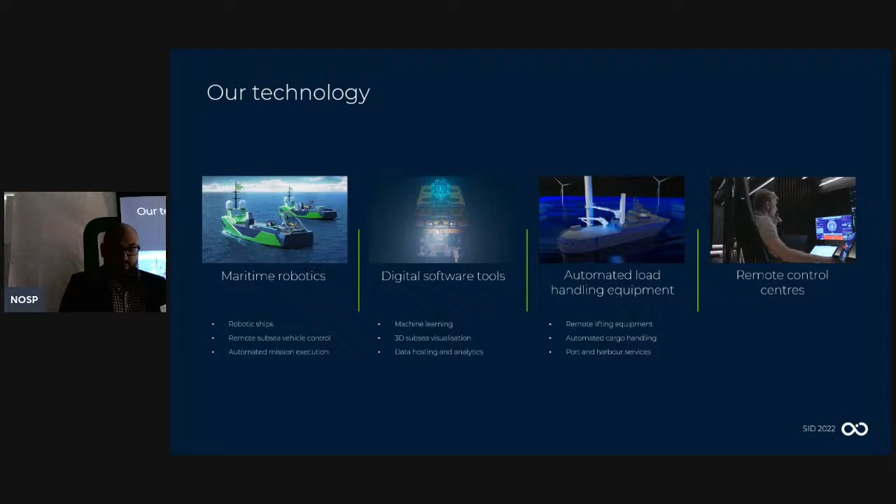And finally, our remote control centres bring all of this together and provide a focal point for our global operations. There's a huge focus on the human factors of everything we do at our RCCs, and being able to build these from the ground up has really given us the chance not only to future-proof them for the next 20 years, but also design and implement a revolutionary network infrastructure to allow us to realise the full benefits of remote operations and robotic campaigns.

Remote control centres, remote operation centres, mission controls, whatever each of us decides to call our own facility, they're not new anymore. Remote operations are alive and kicking and used to great effect all over the world. But when considering the infrastructure required to support remote operations on the scale that we're setting out to do, you have to think a little bit differently.

ROV piloting has been done from shoreside control centres for years now. USV control is taking place over satellite communications as we speak, and remote access to data handling, processing, and analytics is commonplace. However, bringing all this together into a single enterprise IT infrastructure and needing it all to run simultaneously and synergistically hasn't yet been done.

So when we set out to design and build the first of our global remote control centres in the UK, it was important to have ultimate flexibility. We didn't want to have separate dedicated vessel pilot stations, ROV pilot stations, data processing stations. We wanted everything to be multi-role and modular.

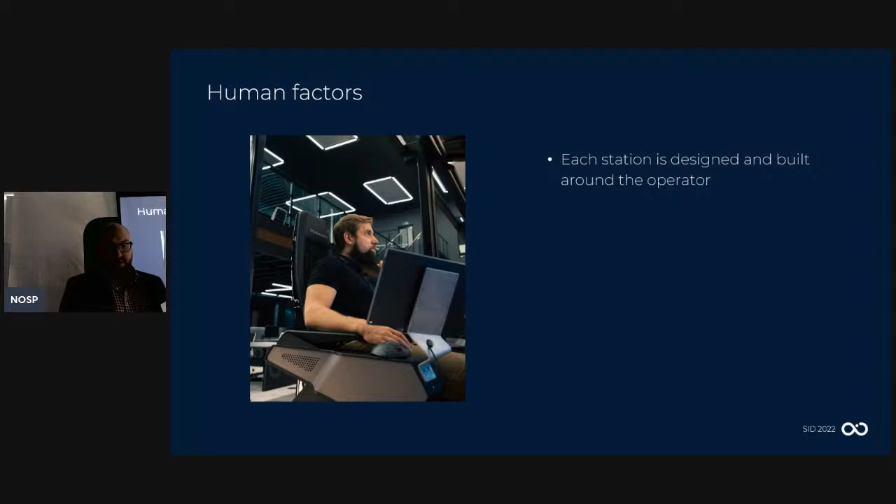Ultimately, we assume that the shifts worked within our RCC will be similar to the shifts worked offshore on a conventional vessel. So the chances are that our staff are going to spend long periods of time in this room, in this building, in these chairs, and we need them to be as safe and as comfortable and as anti-fatigue as possible. Even things like the elevated mezzanine floor in the middle, the glass walls, central supervisor and monitoring stations, the whole environment was modelled in multiple different ways to ensure both operational efficiency, but also promoting the highest level of physical and mental well-being for the staff.

Even in a world relying on advanced technology, our team of experts are responsible for safe and efficient operations at every stage. And without them, we wouldn't be able to operate. Our vessels will be automated rather than autonomous to begin with, and human-in-the-loop operations are absolutely crucial.

Now, as we move towards the trial phase of our remote setup over the last 6 or 7 months, it was clear that a few major hurdles sat in front of us. Of course, building the largest robots in the world brings certain challenges, not only in design, but also in the regulation and safe operation of these ships. I could stand here and talk literally all day about marine regulations for remote vessels, but I'm not going to.

Secondly, trying to build one of the most technologically advanced and complex shipbuilding projects the world has ever seen is pretty daunting. Throw into that an unprecedented global pandemic, a war in Eastern Europe, and you begin to understand why the initial Armada ships have been a little bit delayed.

Putting all that aside, I wanted to focus today on information transfer and how we do some of our data handling. We're revolutionising both ship-to-shore data transfer, but also crucially shore-to-ship as well, which is sometimes forgotten.

And hopefully I'll be able to talk you through that a little bit.

Communications and data transfer is literally at the heart of everything that we do. From vessel and payload control to data analytics, collection, appraisal, reporting, everything relies on maximising the amount of information that we can transfer over the internet. It's all in a low bandwidth, high latency environment, and that brings its own challenges.

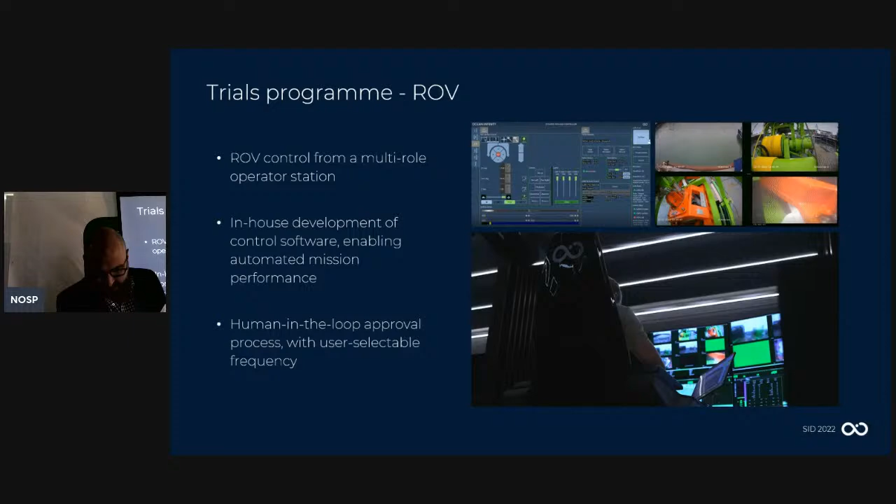So what have we learned from the recent trials as we push towards Armada operations when the vessels arrive? Well, firstly, we've successfully tested and trialed our payload command and control, and with that, the real-time monitoring of data quality and file health over low bandwidth. We've worked on our quality assurance processes, and we've worked out what would ordinarily take place with the offshore team, replicating that experience from the comfort and advanced infrastructure of our remote control center.

These are some key steps between now and fully fledged uncrewed operations, and as we transition to a more robotic future, these elements will form the basis of our data journey with our clients and with our uncrewed ships. We're currently working on more data standardization and governance as it moves through our handling process. We're using more automated analytics and appraisal, and we need that standardization to assure that the same high quality products are being produced for our experts repeatedly and safely. This also allows us to move ahead with a lot of our machine learning that I'll touch on another time.

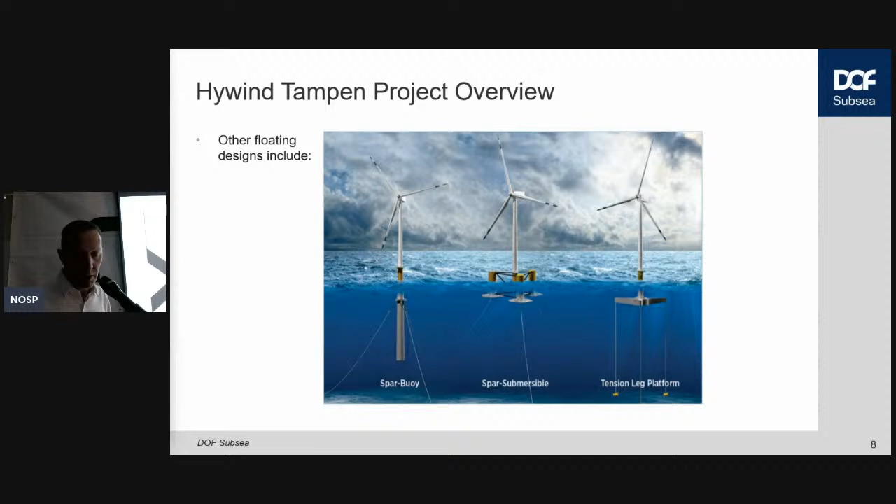So where we're at the moment, status August 2022, all 19 of the anchors are in place, of course, in the Honeycomb design. There was a really good LinkedIn 3-minute video explaining the why and what benefits the Honeycomb design brings - it's extremely financially efficient, saves a lot of money by having it in those designs, and you can take away floating wind turbines from one location and take it to shore and replace it with another if you so desire. So there are a lot of benefits with that Honeycomb design.

All 33 anchor chains are in place, installed by Skandi Skansen, as I mentioned. So 7 of those turbines have gone in already, and next year, April 15th, is a tentative date for start-up of what would essentially be phase 2. We will be going out with Skandi Iceman, and most likely the other tugs that we used this year, which I'll go on to a little bit about shortly. I do believe that most of the equipment actually is ready - the only thing that's really holding back is a couple of items, otherwise all 11 would have gone out this year.

It's a shame because the summer was quite a good one for installation as well. They were knocking them out of the ballpark at points, towing them out within 3 to 4 days and putting them in again, then coming back and collecting the next one. So 3 to 4, 5 were going in over a month period, and 7 went in over just under 2 months, so not a bad installation rate. That's where the project is at the moment, so we'll start again next April.

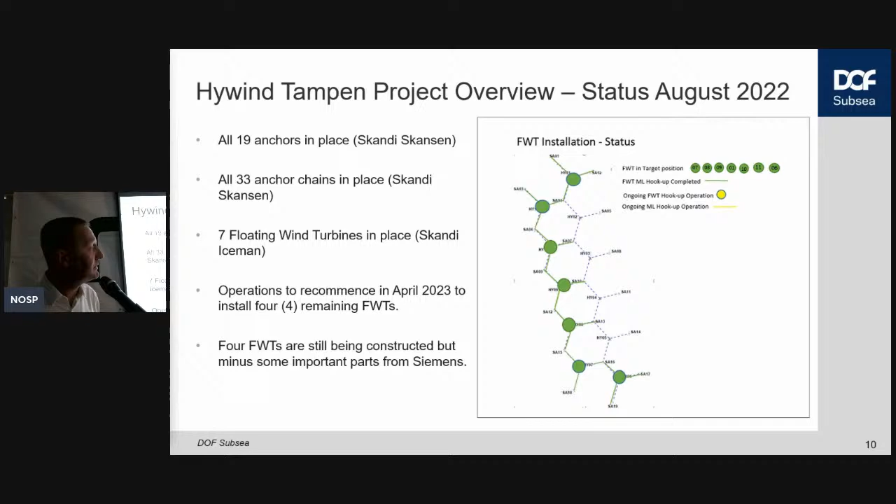A little bit about one of the requirements. It's all very easy, you can just make me think this is a glamorized rig move. In some ways it is, but there are elements and a lot of considerations that need to be taken into account when towing out and installing some of these turbines.

We consulted a lot with the captains on the tugs and on the installation vessels as well. We certainly had some poor experiences a few years ago that we didn't want to replicate with Skandi Iceman, which is ironic because it's our vessel. But we listened, sat down with them, and we came up with a solution that was probably more extensive than we would have liked, but ultimately everyone went away happy and we got good feedback on it. So what they were essentially looking for is positioning updates during hookup and tow out, quite self-explanatory, that's what you would need.

Heading updates as well, that's very key. And what was also very important was the mooring line and pad eye. They really needed to know where those were in relation to the tugs, all 3 tugs, and the floating wind turbine itself. There were also some interesting aspects, some lessons learned that came out of it where we need to make improvements, not just ourselves, but also with some of our subcontractors and the client as well.

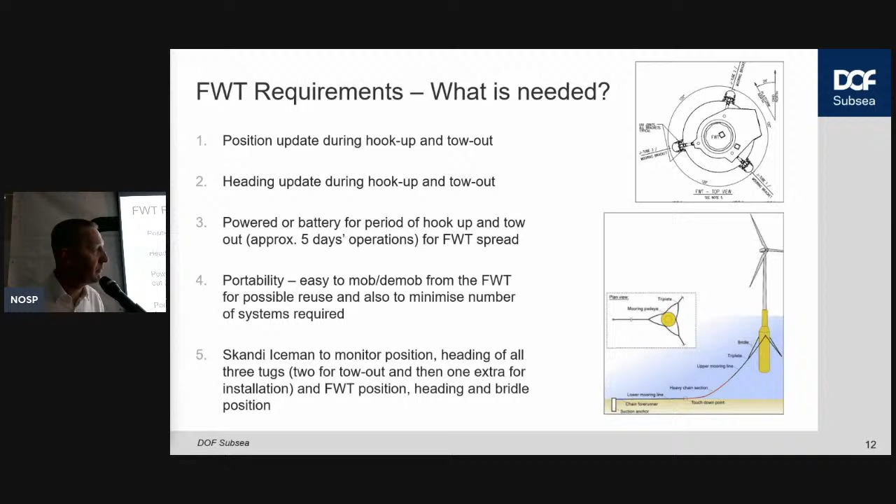So I just thought I'd show you what it ultimately looked like, this is how it looked when it was being towed out. This is just a drawing, but I do have NaviPac screen dumps of what it looks like. There's the lead tug, 2 tugs managing it, and a 4th tug was used and would shadow the tow out. When you got out into location, the lead vessel would then transfer to become the installation vessel, and the 4th tug, shadowing, would then become the positioning vessel.

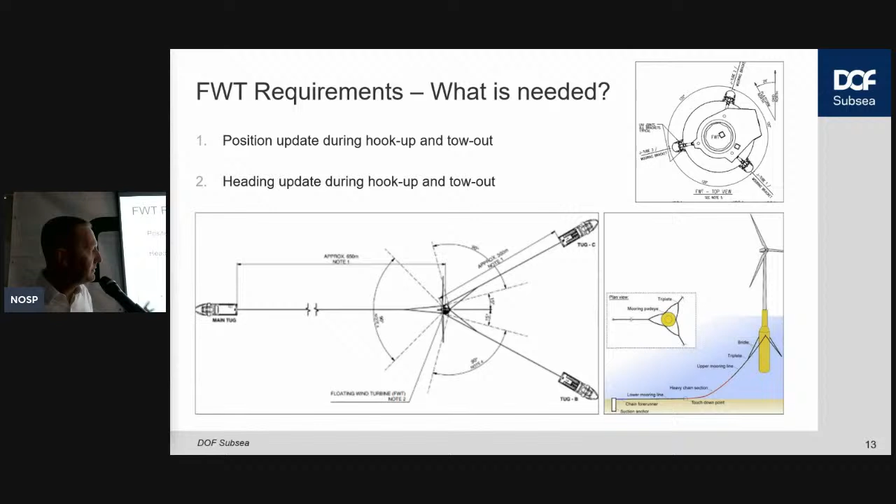So it took about 3 to 4 days to install, but that was the key part of what this was all about.

So this was the Skandi Iceman, one of, yeah, these are the project essentials. This is what we had to do, all that we required from early in the year to get ourselves to the position where we were comfortable to be able to tow this offshore and accurately position it. Tolerances were not exactly high for this, as long as the anchors were in place, everything else seemed to just flow. So once everything was set up, it was very much a babysitting exercise, but there were lots of teething issues at the start.

So there's a one-off installation vessel and 3 installation tugs: the Norma Sigma, the Olivia Venus, and the BB Octopus. All of those had the AIS tug kit and the V123 of the Hemisphere, which I'll come on to in a little bit, and of course the 11 off floating wind turbines.

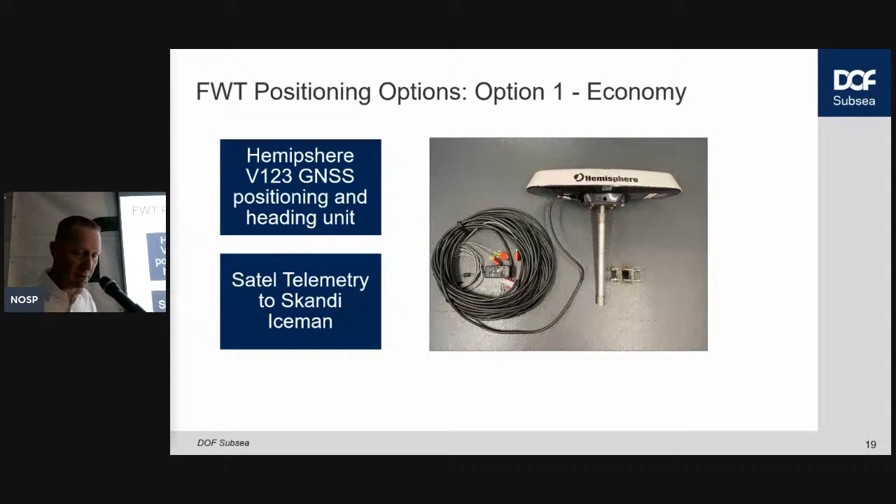So this was the economy package. The other one was the deluxe package, which is the fog gyro instead of GPS for heading and the radio Wi-Fi for transmission. This was definitely the Rolls-Royce solution, which we obviously looked at, but for various reasons weighed up pros and cons of each. We looked at the hemisphere and the fog gyro.

Basically those are the 2 options you've got. The heading was slightly off on the hemisphere, but considerably cheaper. I think we're certainly finding it - from a survey perspective, trying to get hold of equipment now is not easy, much like the airline industry - everyone's woken up and wants to do everything yesterday. So equipment is actually quite difficult to get hold of. Gyros had a long delivery time.

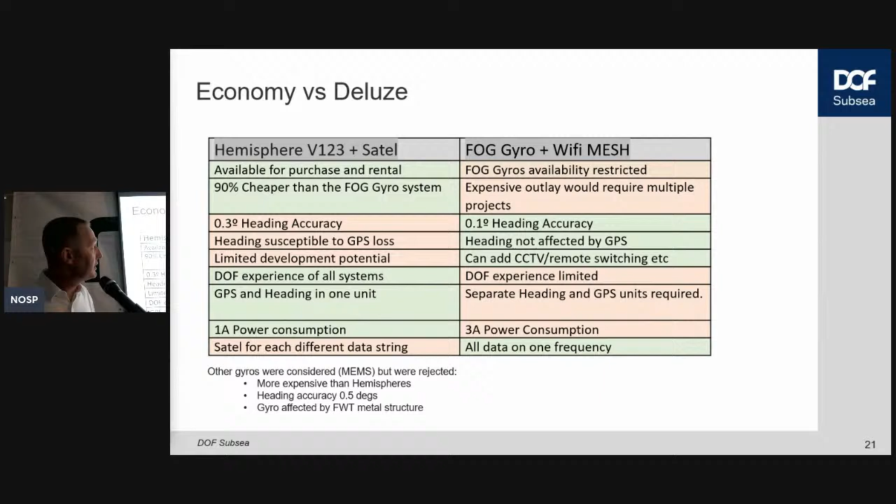The hemispheres, we already had quite a few of them in-house, and we needed to buy about 4 or 5 more. But ultimately it came down to cost - this isn't the oil and gas industry. We did look at other gyros; there are other gyros available on the market, not just the ones you saw on the screen just now. We looked at the MEMS, but ultimately we thought we're going to go with the hemisphere because we had experience with it, it was cheaper, and it fitted all the parameters that we needed to do the job. So it's economy versus deluxe, and the winner was, of course, the hemisphere.

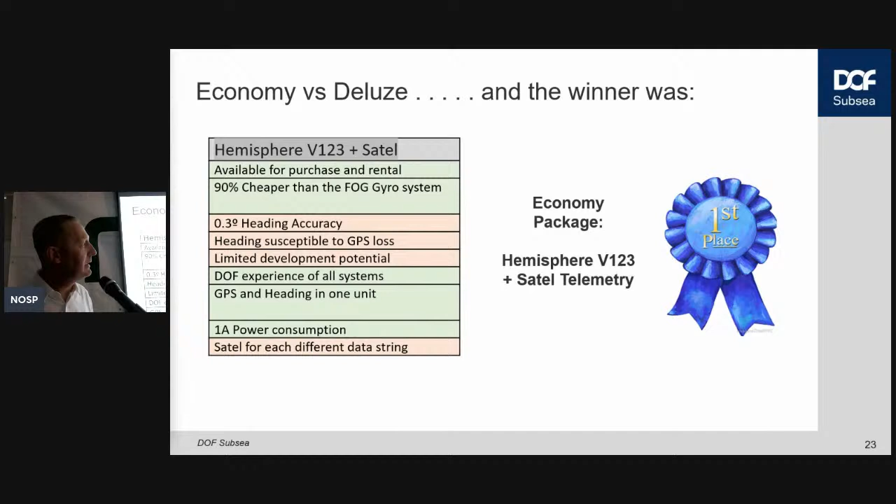As I mentioned, I don't think, like the oil and gas industry many years ago, it's very much necessity now within renewables. It's a different mindset that has to be taken. It's very much cost effective, and I think that also will come down to some of the procedures we'll hopefully be following in a few years from the client, that will drive us forward. So I think many years ago it might have been the deluxe model, but within renewables it was definitely the economy.

So what did the system, the hemisphere, the floating wind turbine survey equipment installation comprise of? Basically a hemisphere, antenna, and a cable. So very straightforward on that front, not that difficult. A SATEL telemetry kit back to

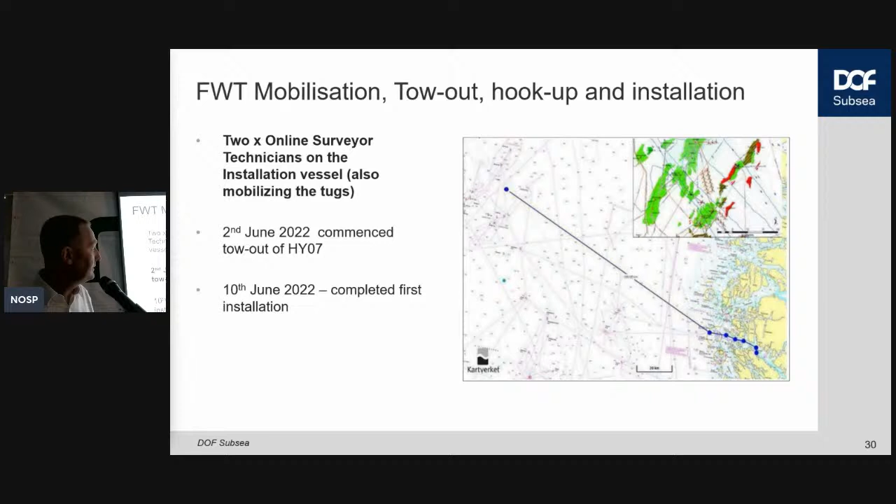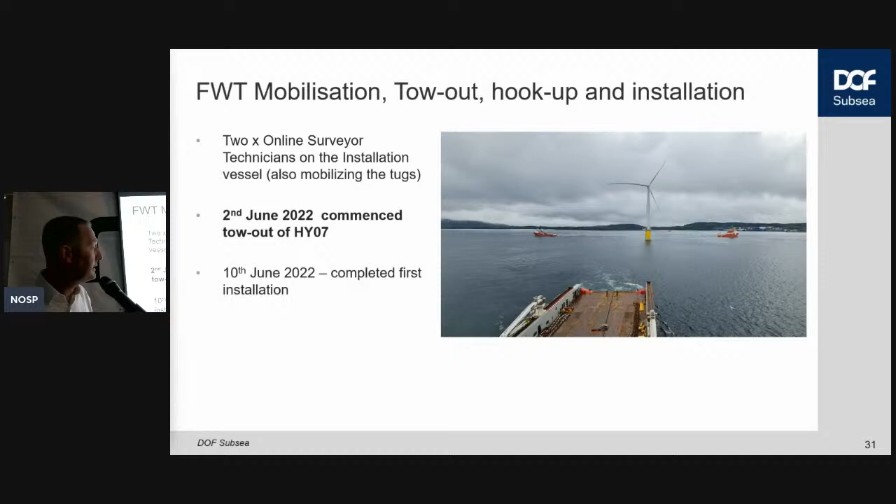So that is really the crux of my presentation. It wasn't as technologically advanced as Ocean Infinity, but it's a necessary part of what we're all going to be doing going forward. It's a survey project, ultimately positioning, and it was a very interesting project to be involved in. At the end of the day it also gave us the opportunity to take some fantastic pictures, both near shore. Some of our surveyors got very arty towards the end, and were sending me lots of lovely pictures.

So I just wanted to summarize some lessons learned, which I've mentioned quite a lot actually as I've been going: updated guidelines for renewables. This is the first big, large-scale offshore floating wind project in Norway. There's potential there to improve some of the procedures and guidelines on how we do that.

Earlier consultation of the contractor in the project workflow would save cost, time, and resources. We struggled to get the information that we thought we needed to do the job and deliver the professional outcome we wanted to the client. So again, small tweaks, nothing major, just maybe some changes in mentalities and attitudes.

There are so many contractors involved in these projects, not unlike oil and gas I'm sure, but greater interface management of contractors would save time and a lot of money and resources. So it's just a learning curve.

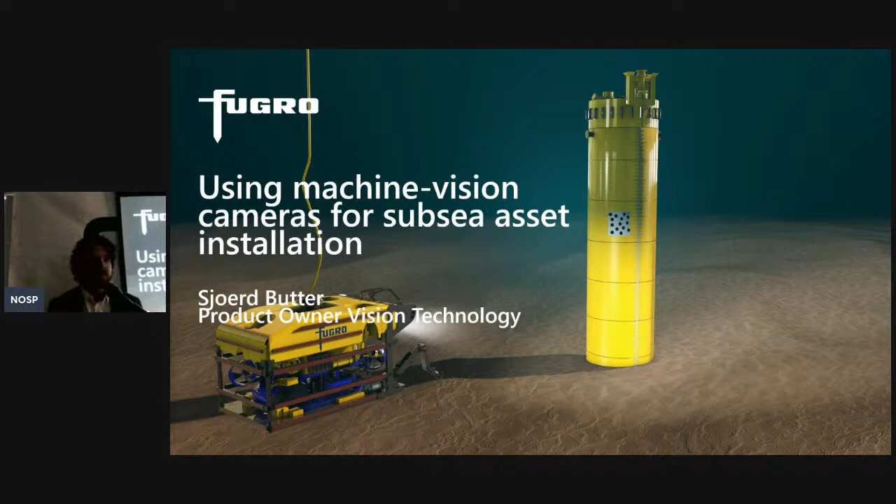The topic of today is clearly offshore - what we call the marine asset integrity environment, specifically positioning of assets. As I mentioned, today's topic is using machine vision cameras for subsea asset installation. What exactly does that mean? For installing heavy structures, you actually need quite heavy sensors.

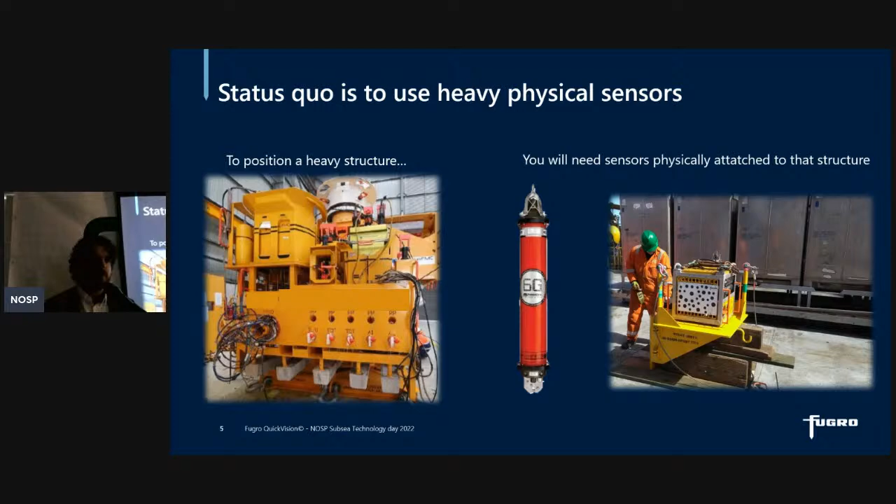I think we're all used to the classical positioning jobs where we have either a wellhead to install, a subsea anchor to install, and we have to mobilize either USBL or acoustic signal beacons or gyro packages. Typical examples you see here on the right - you mobilize on the assets, you dimensionally control them in, you test the signals, and you do your installation job as requested by the client.

However, using these types of sensors carries a certain risk, and I've provided an overview of this risk. Most of these sensors are actually based on batteries, and no matter how well you plan for your job, these batteries carry an inherent risk of failure. They can be charged at the start of the job, but sometimes we work in very deep waters. They can be turned on before lowering the structure, and the battery may run out of power, leaving you basically blind on the exact position or orientation of your asset.

Acoustic signal loss can occur - if no cables are attached to these sensors, how do you get the right information all the way up to the top side or to the vessel? So that's something that is risky as well.

There are some safety concerns around using these sensors. Most of the time they're heavy, and lifting operations are involved in installing them. Every lifting operation needs careful planning and the right safety procedures in place, because in itself a lifting operation will bring a risk no matter how well you plan for it. And the last point is that installing sensors, but especially removing sensors from a structure, can be quite a time-intensive job. You need an ROV in place, sometimes divers, but removing that sensor can be quite risky and time-consuming.

More like moving pictures again. Is this watchable or should I just skip over it? Yeah.

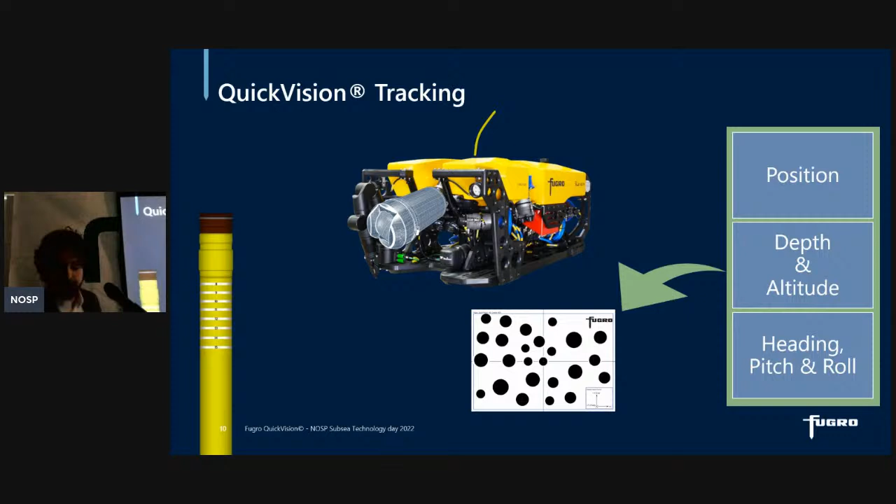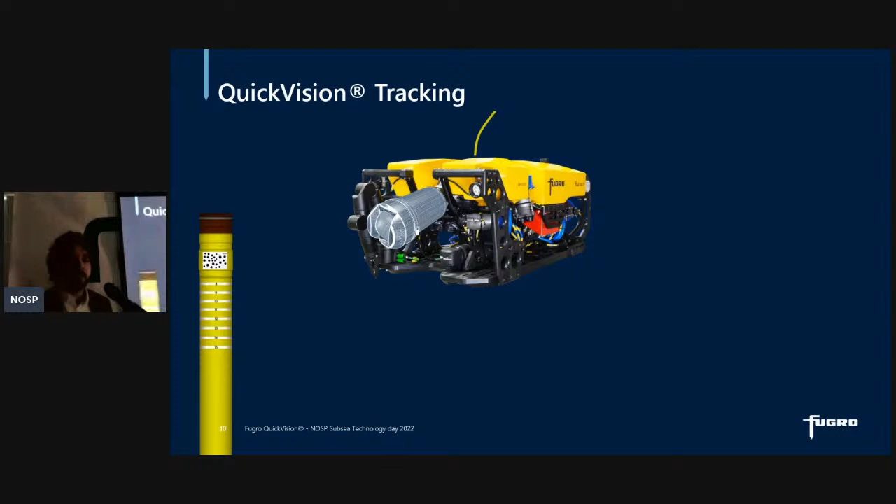Instead of placing physical sensors on your asset, we can remove these sensors and get these readings directly from the pattern. So the only thing that you have to install on the structure is the pattern. By placing the pattern, in this case on the conductor, and dimensionally controlling that pattern, we can simply observe through the camera the exact pitch, roll, and orientation.

We do that not just with a camera, we actually combine it with sensors that are typically available on the ROV. That can be either a gyro, an INS, or USBL if you're interested in the exact position of your asset. Combining that with the video stream and the readings we get from the pattern, you get accurate data from your asset.

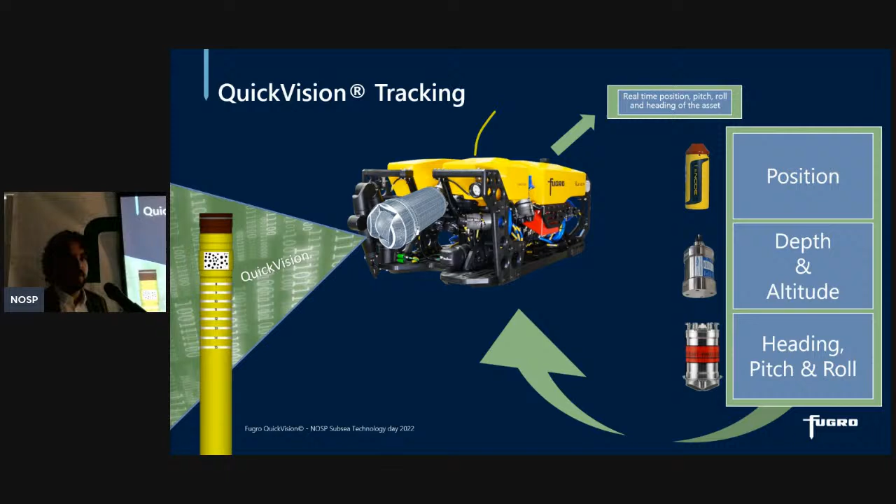You actually only need 8. Most of the patterns we use have up to 28 of these black dots, so there's built-in redundancy, and you can use as many as you want. It's relatively cheap to produce, it's a sticker file. So you place 8 or 9 all around the structure, load them into the software, and that's all you need to get all the accurate information for this asset positioning job.

The pattern tracking also brings another convenient functionality, especially in follow-up work. Whenever a prior campaign installed a structure on the seafloor and a pattern is already available, you can use a principle called relative positioning to position the other asset on top. This removes the complete need for any USBL or LBL positioning to be in place. Your ROV can basically only use the camera and a gyro to position this structure on top of the other one, saving a lot of headache with USBL systems and removing it from your project. It's a good alternative for these types of scopes.

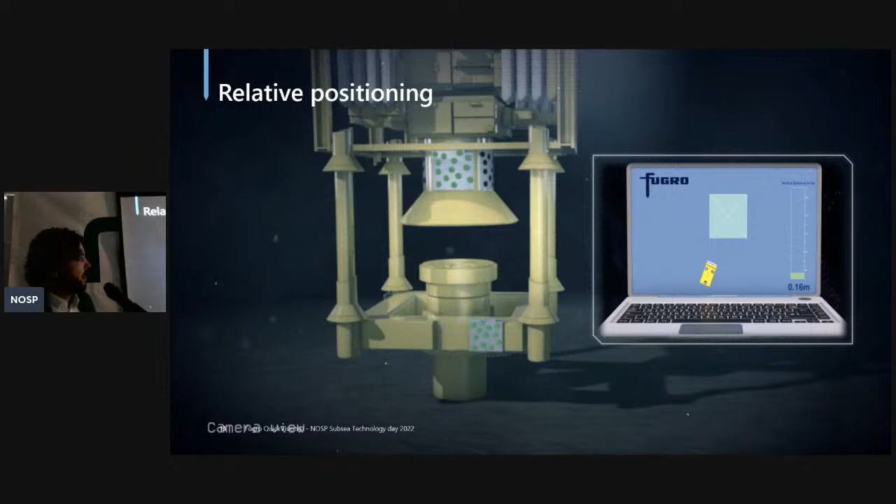Zooming in a little bit on the Augmented Reality Toolkit. I think it always presents itself on more random occasions in the project. Whenever we're already in the field and something pops up that needs to be measured, it's this toolkit that we call. I've got three videos, and it's a bit risky, but I'm going to try to play them because they have an excellent demonstration of these tools.

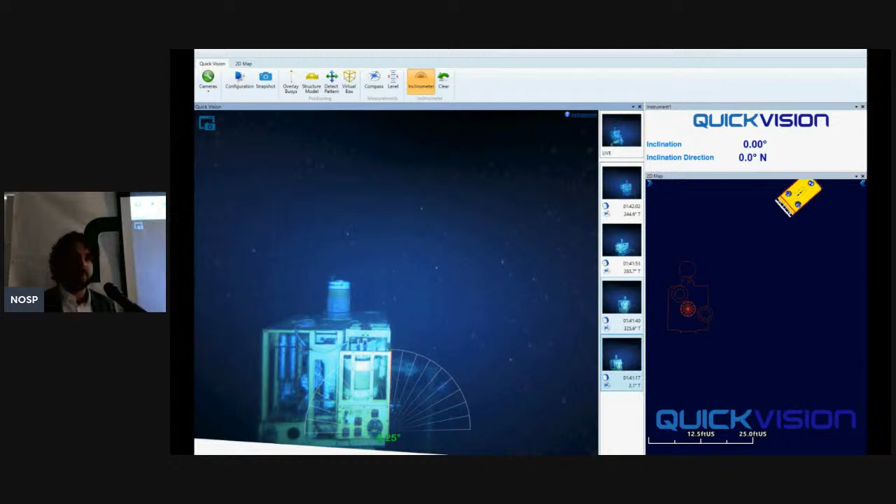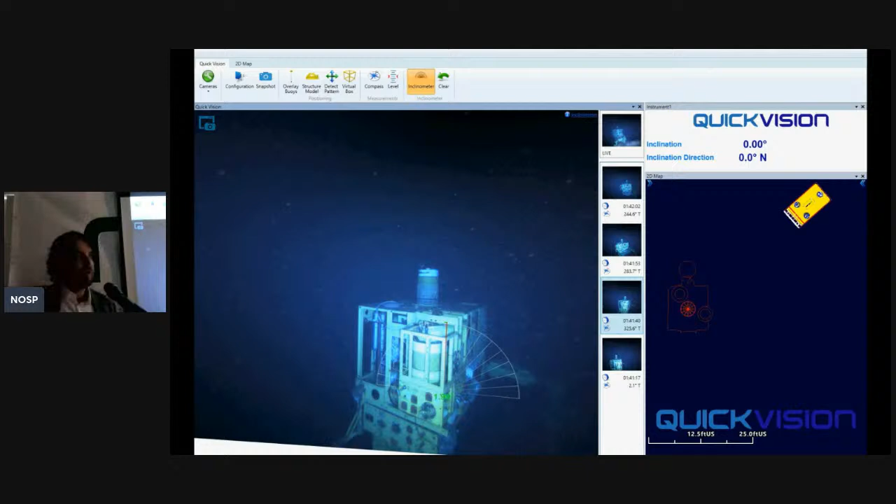This video is a demonstration of the Protractor Tool. Here we use just the video camera and the sensors on the ROV to project the tool into the video and take an inclination measurement of a wellhead. By flying around the structure and taking several snapshots, we can make multiple photos and measurements, and combine that into a report that will quote an inclination and inclination direction. No patterns are needed, no other sensors are required - it's just the video camera and your ROV that will facilitate these types of measurements.

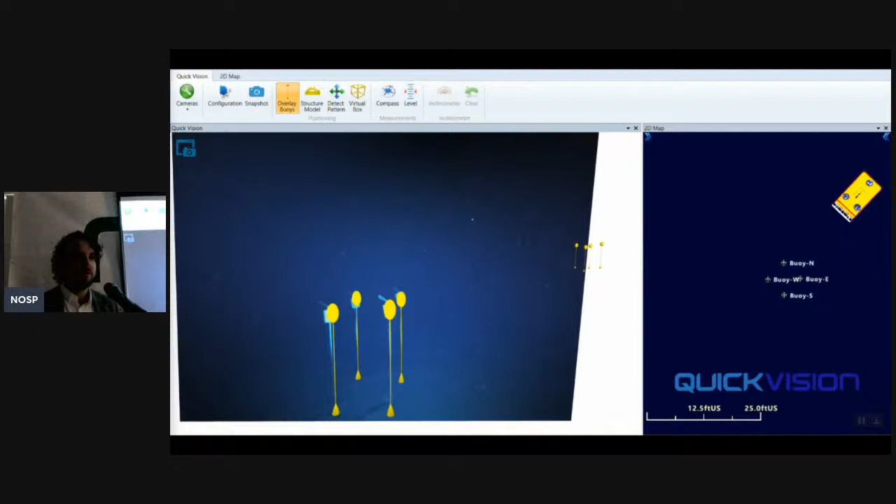Another one, really convenient in conductor installations, is to project physical marker buoys. When you have the coordinates where the buoys should be installed, you can make a separate installation campaign completely obsolete. Of course, you need positioning for your ROV, because that's what the camera uses for projecting that virtual marker buoy into the field of view. Here you can actually see the real marker buoys overlaid with virtual marker buoys. You completely mitigate the risk of marker buoys detaching if you have an installation done in advance - a really useful tool for positioning.

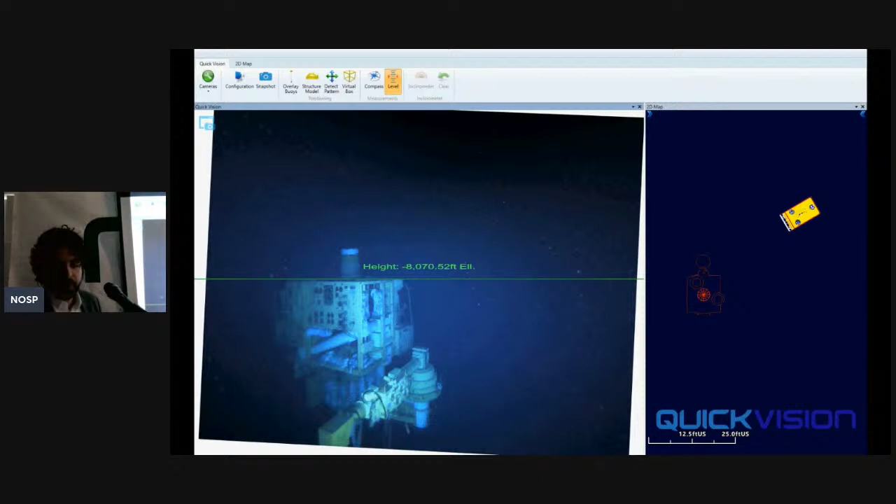A bit more advanced in the Augmented Reality Toolkit is the bounding box, or virtual structure. This was actually quite an interesting job we did a while ago for a client in Brazil - a guided conductor installation. The client was concerned about the azimuth, the heading of this particular structure. But installing patterns on it and observing them would make it very difficult to get a continuous track. Either you'd have to install them all along the conductor, or you'd lose track at some point.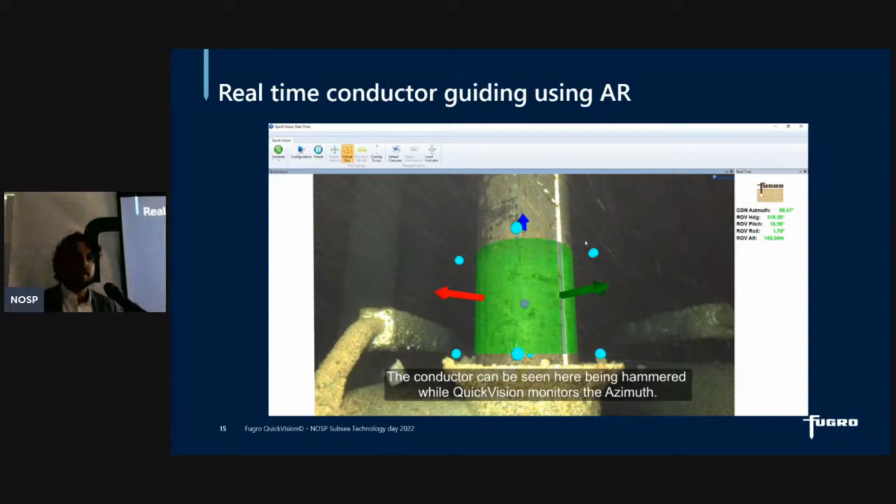So we introduced this bounding box - you can see that white line on the guided conductor - and that was the reference for our surveyor to actually take a measurement. By placing this virtual box over the guided conductor, we got all the relevant parameters like azimuth, pitch, roll, and position. A quite convenient tool, giving you real-time information, and you didn't have to stop the job to get those measurements in.

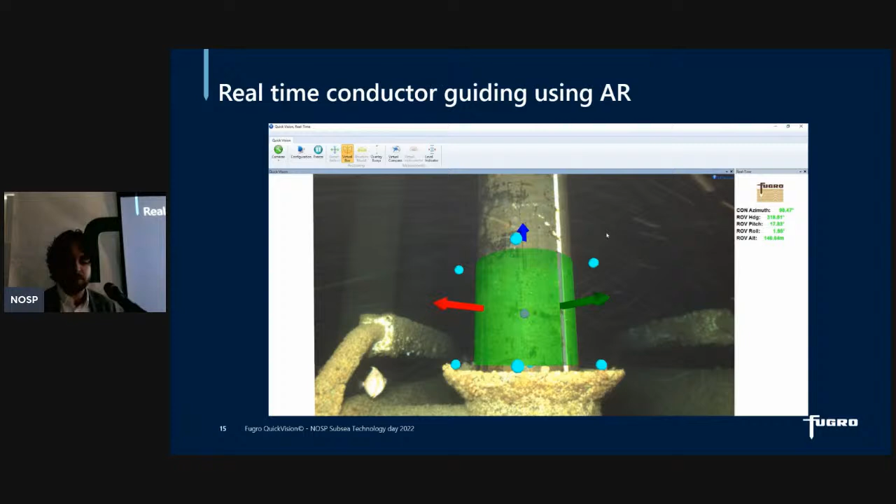So why would you like to use machine vision cameras, or quick vision, instead of using the status quo type of technology? First of all, it's risk mitigation - not having to do lifting operations on board of your vessel, no work in the yard, but simply placing a light sticker pattern and dimensionally controlling it on your asset saves a lot of risk offshore.

Not having the risk of batteries failing or sensors failing or having a faulty acoustic signal is also completely mitigated because a pattern will just be there on the structure. Installing 8 of them will have built-in redundancy, and the camera is already connected to the ROV through, for example, a MUX, so that data link up to the vessel is actually quite robust, which will also save you the risk of failing sensors.

Not having to install or remove sensors, making lifting operations redundant, is actually a very large cost saving. They can run up into sometimes days, but not having to install sensors, for example, in risky environments, can also increase your weather window. That's a case study we'll come to a bit later.

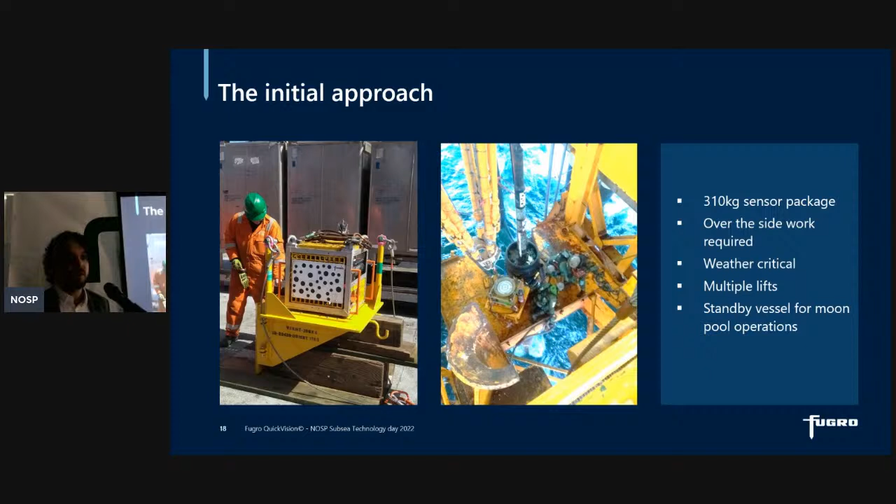So it was either choosing downtime or choosing Quick Vision as the primary solution for this positioning job, and we chose Quick Vision. The client trusted Quick Vision to do this job. You see one video on the screen.

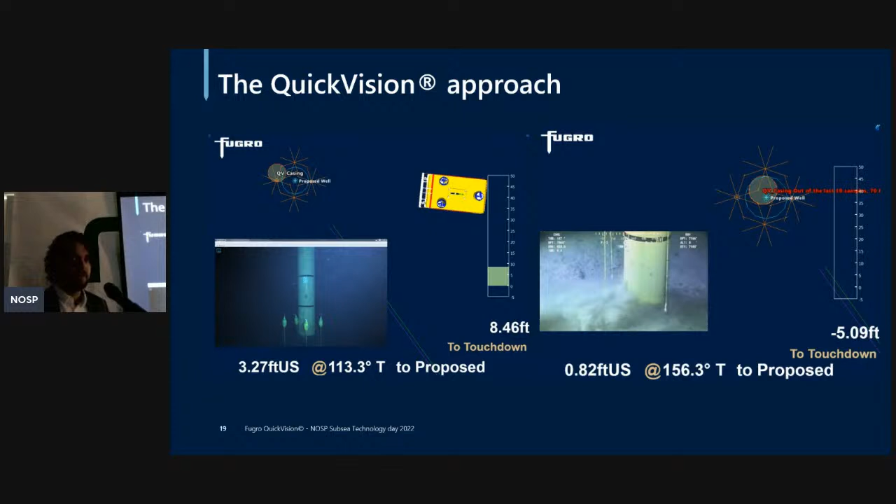So what did this mean for our client? In the end, we saved 10 days - 10 days of expensive semi-submersible drilling rig time. That's quite a substantial saving. We all know the cost of drilling rigs in the North Sea. So choosing Quick Vision as the primary solution was a real benefit to Shell at that moment. They were really happy with the job, and we've been using Quick Vision with them in the North Sea more often after that.

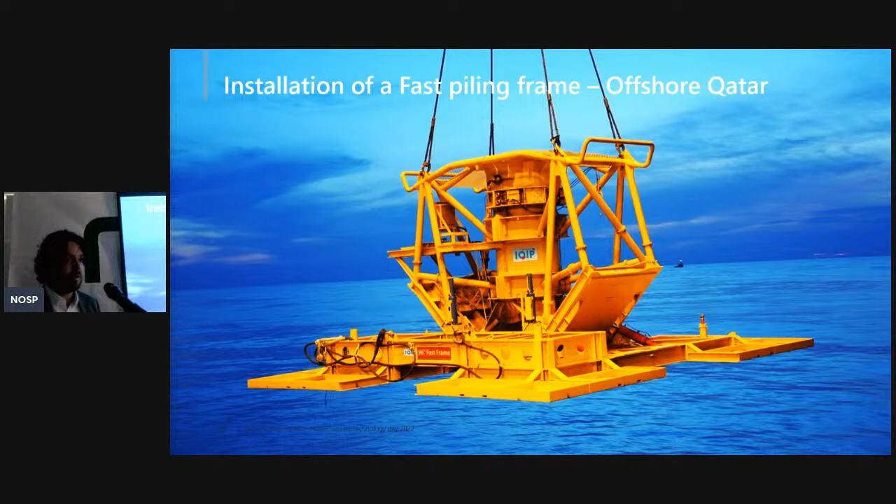Another use case is for installing pin piles, in this case for a client in Qatar. The client had already contracted Fugro to position this frame for their piling operations, and they contracted us with a typical scope: please position our frame at 7 different locations. The position of this frame is quite critical because it's used for mooring a floating platform.

The solution that Fugro proposed before knowing about this camera in the region was to use USBL beacons. However, the client had a concern around using USBL in these waters - it occurred quite often that the signal was lost, which resulted in downtime. So they were actually quite open to our suggestion to try something new and use Quick Vision patterns instead.

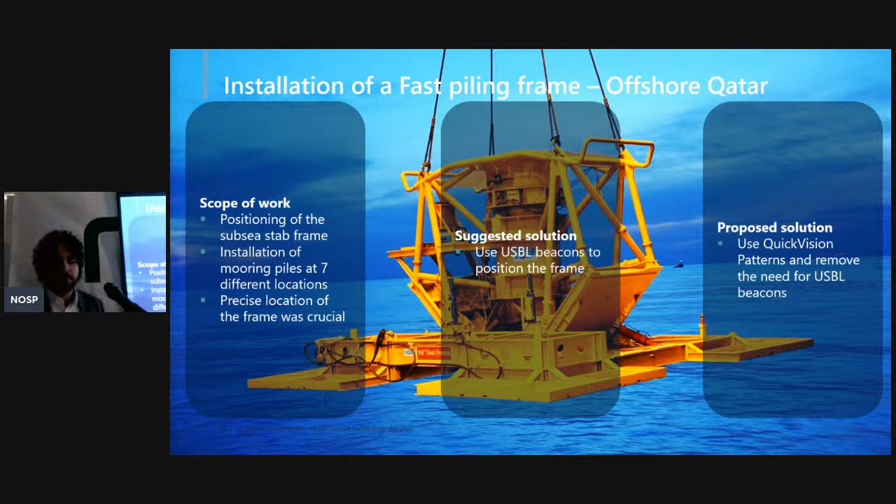So we commenced the job. We did the analysis together with the client on how this would impact their work, and we estimated the impact would be saving about half a day of drilling and installation rig time. This is the actual footage of the job.

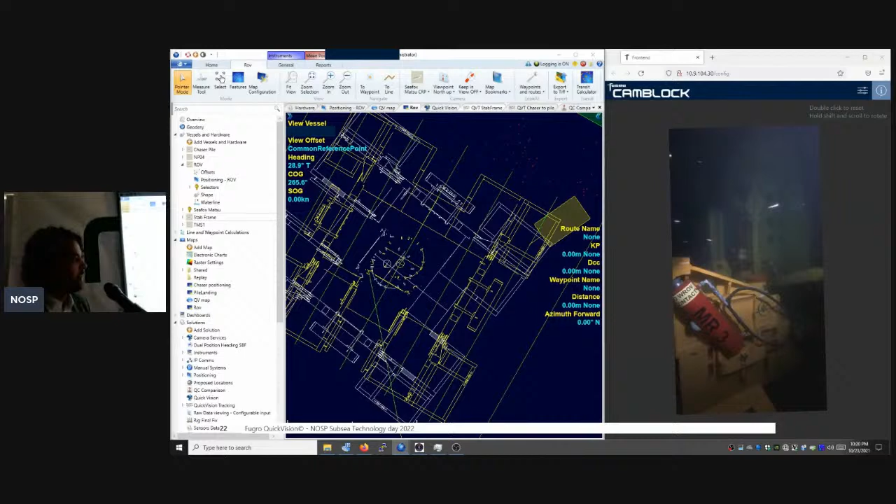You can see on the left our survey package Starfix, that's where Quick Vision runs as well. On the right is the actual footage from the cameras I showed at the start of this presentation. Very crisp image. We actually got feedback from the ROV surveyors that they liked our surveying camera quality better than the camera on their ROV at that time, because it has a very wide field of view.

You can see the structure updating in real time on the map, and it was a huge help to the crane operator to install the frame in the exact right location.

So debriefing with the client, we did the analysis and thought we were going to save them half a day. Actually, it turned out we saved them a full day of installation work time. Furthermore, the client appreciated the real-time data. They had one other sensor installed on that structure and wanted to cross-reference between Quick Vision and that sensor. It was a huge help for them to make decisions on the spot and understand that the frame was in the exact location where they needed it to be.

I was talking about the Augmented Toolkit, and sometimes its use just pops up randomly. In this case, one of the piles was installed, but we wanted to understand what the inclination was. It was now as simple as pulling up the inclinometer tool, flying around it, and taking the measurements, with no need at all to interface with the actual ROV on that pile. We had a result back in less than 25 minutes, so the client on board felt comfortable continuing with the job.

I hope these examples and the technology made you think about potential applications. I can understand there may be some questions as well, so I would like to wrap up this presentation and have your questions. Thanks.

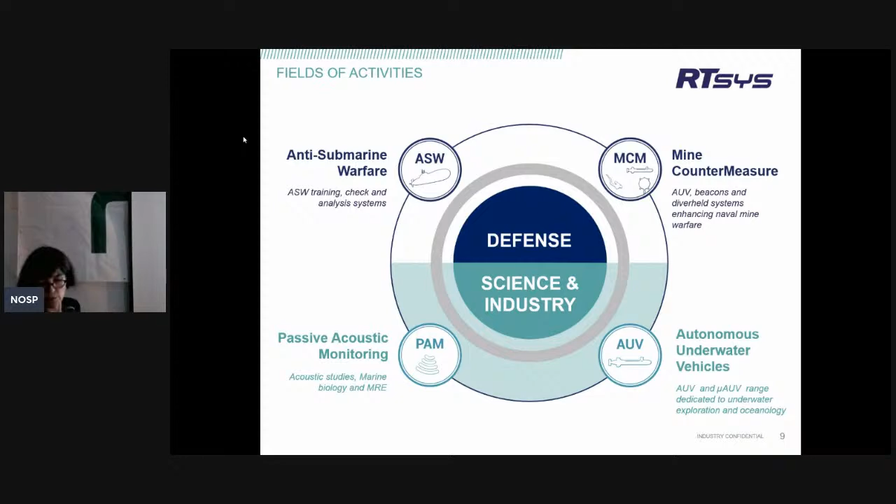So there's the Comet 300 and its different uses and applications. It's an autonomous vehicle that can operate at 300 meters depth, with an endurance of about 20 hours, of course dependent on the different payloads it's carrying. Generally we are talking about 12 hours at a speed of 4 knots. The length of the AUV starts from 1.77 meters and can go up to 2.2 meters with different payloads.

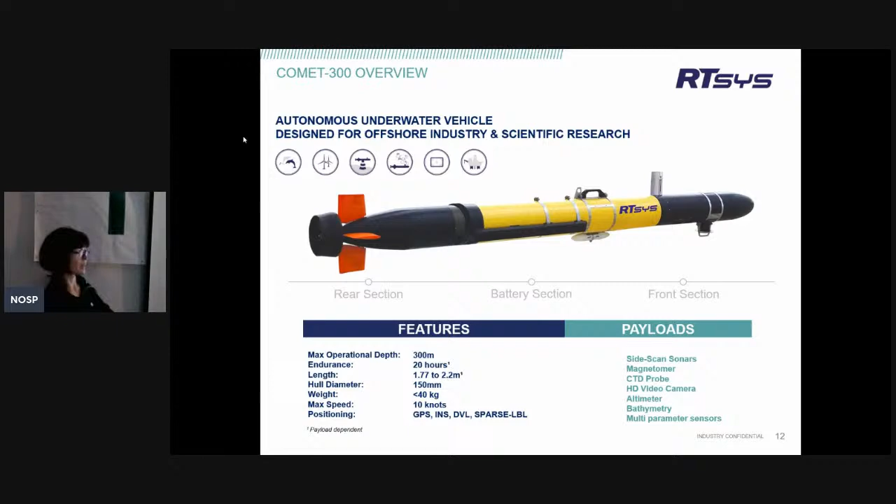We have different payloads: side scan sonar for signal mapping, bathymetry, magnetometer to detect magnetic objects, CTD probe for environmental studies, altimeter, and other monitoring sensors. As for navigation capabilities, you have common sensors - GPS, INS, and DVL - and you also have our own protocol, a SPARSE positioning and communication sensor that enables very accurate positioning of our AUV at the bottom.

So I will play a short video just to show the programming of the mission.

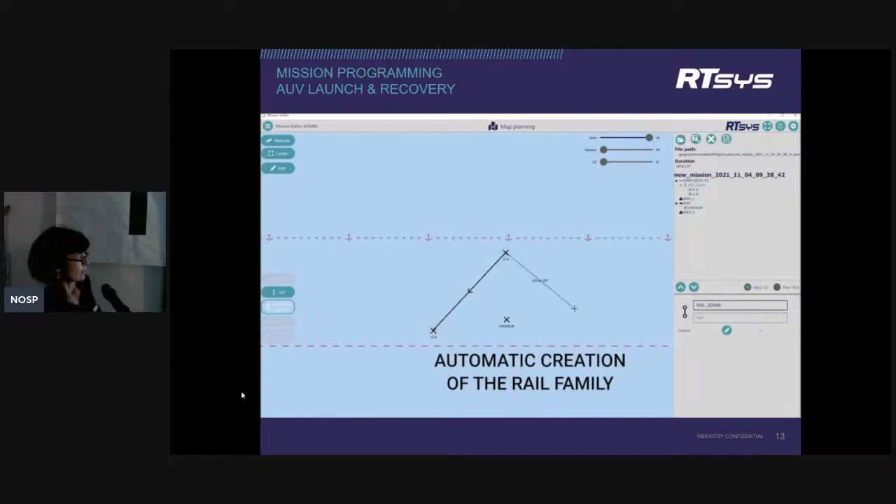Once it is done, we can start creating the first navigation path, so we can be sure of the path that the AUV is going to follow, and then we create a family of waypoints, including a start waypoint and an end waypoint.

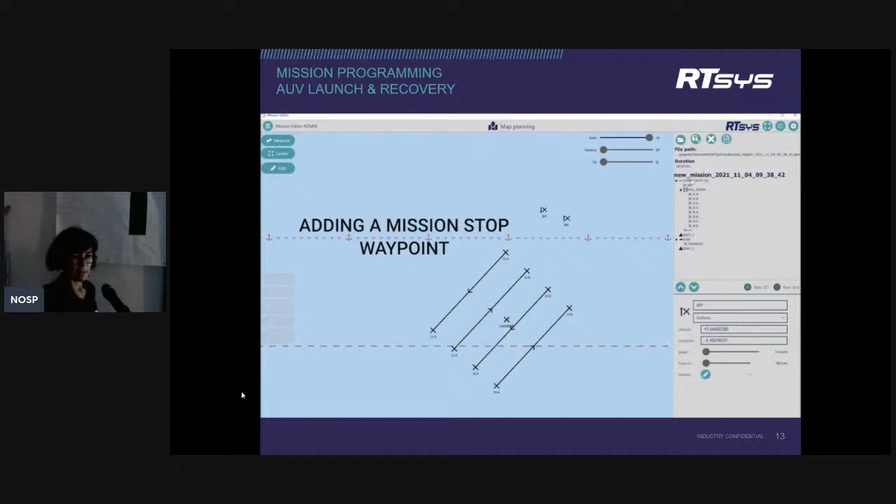As we have acoustic communication, we can update everything about battery level and different sensors. Once it is done, we can roll out the mission on the AUV.

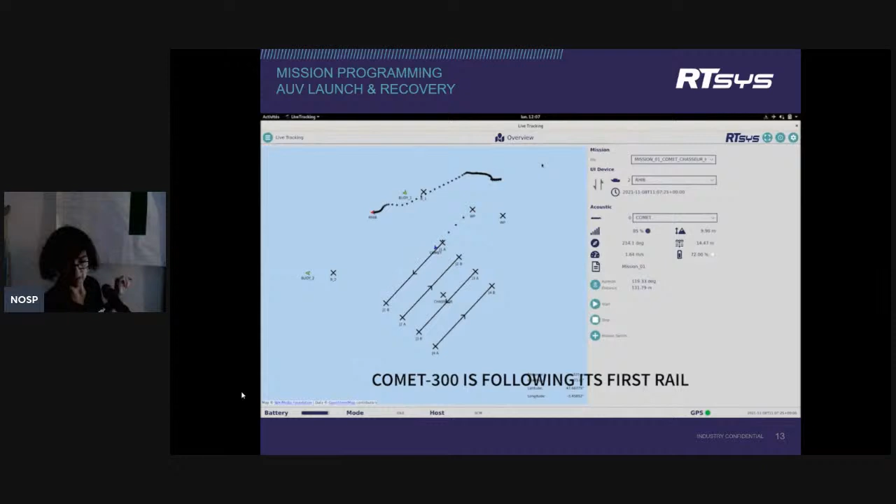That is then going to carry out the mission. Here we can follow in real time the trails where the AUV is in the water.

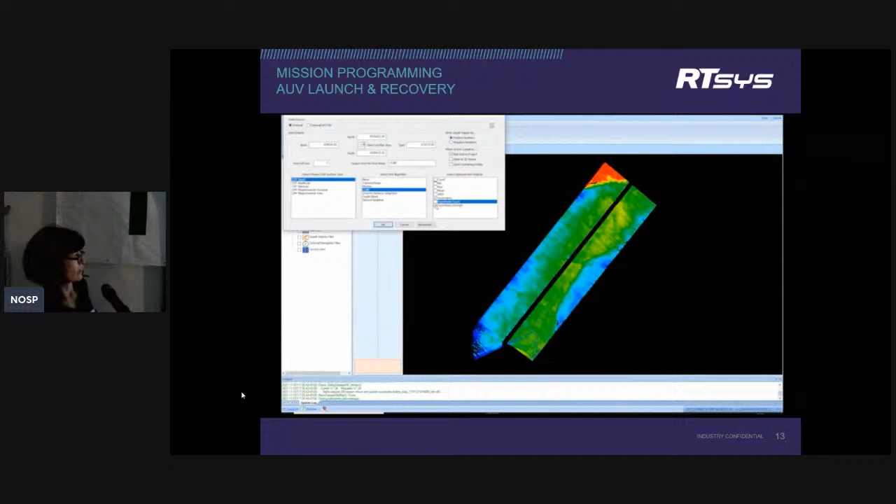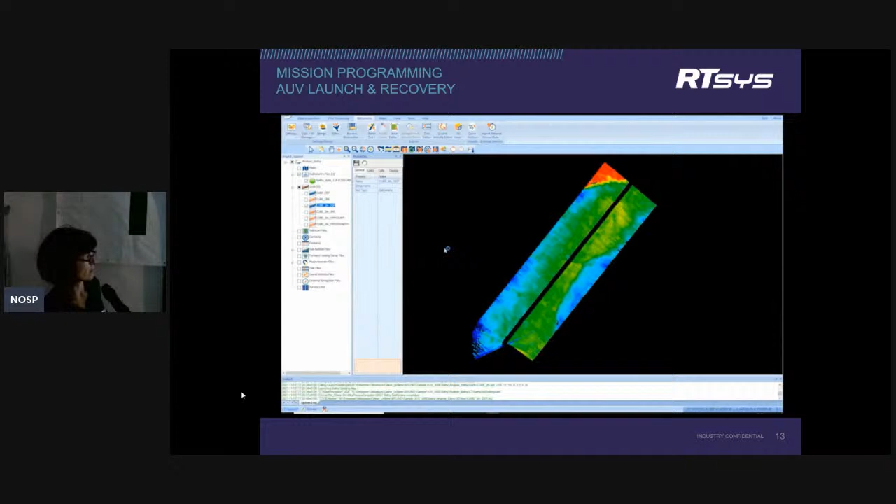Once we have it on board, we can download the data thanks to internet and start data processing. Here we have an example of bathymetry data processing, getting an image of the seabed in 3D.

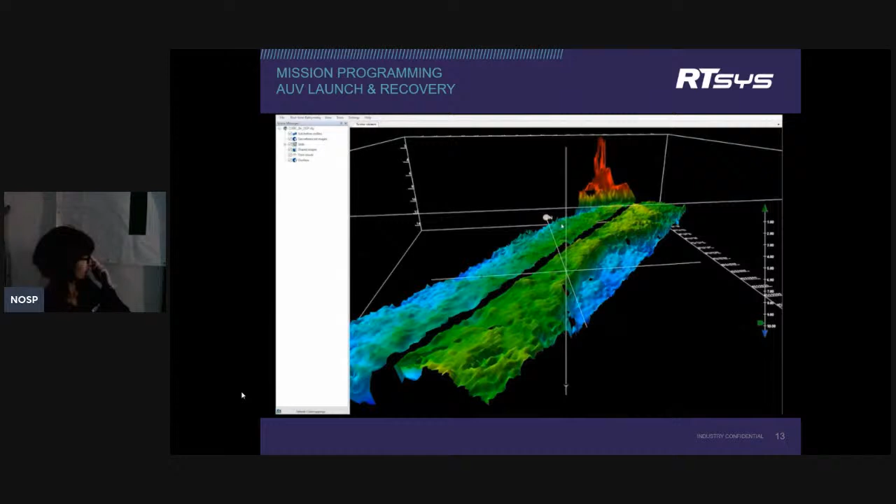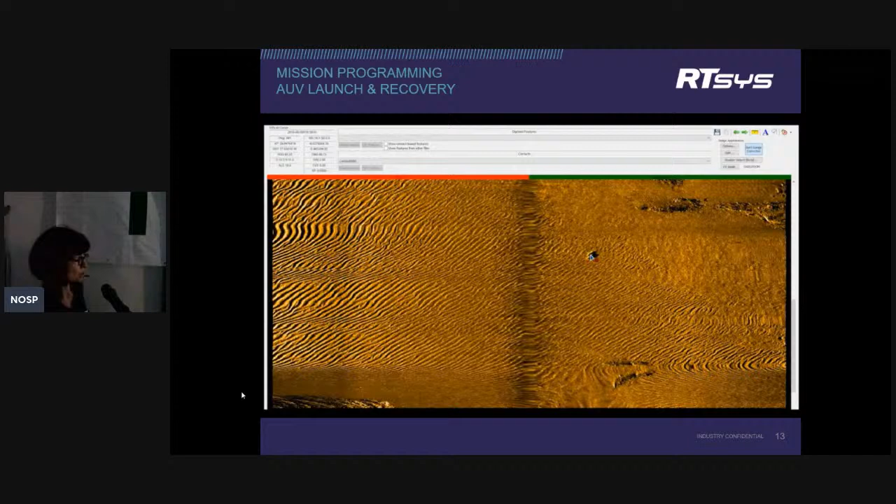We also download, in this example, all the images from the side scan sonar. So we have a mosaic of different images, and then we clean each image in order to get a nice seabed image on which we will be able to identify the point of interest and then measure the target. Here it's mine to measure the target, to geolocalize it, and also to zoom in on it.

So it can be interesting, for example, to do a first pass with the seabed thanks to the AUV to identify the points of interest, and then to have, for example, our ROV go back on a second mission to treat directly the points of interest.

It also has the capability for more communication, and the possibility to work in small groups, meaning that several AUVs can work together. We have a master AUV controlling the other AUVs, and they are all communicating together.

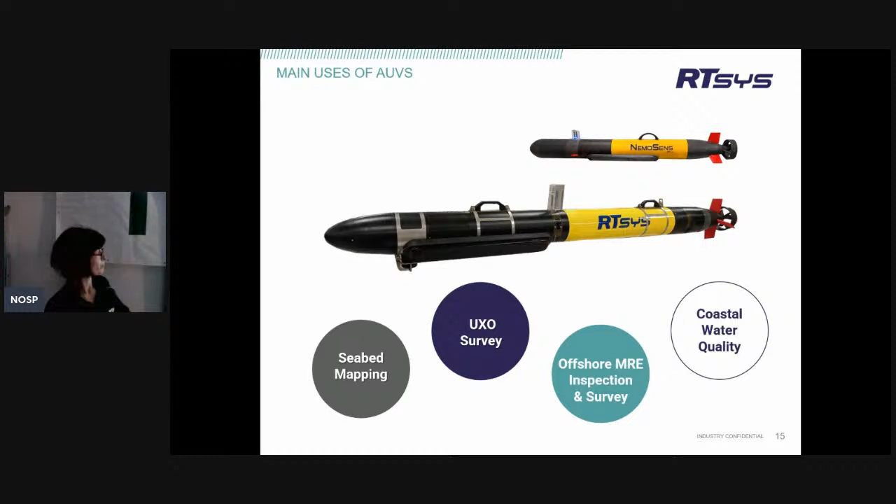So we made a focus on the seabed imagery to show some images from the side scan sonar. Here in this example, we can see a mine with a length of 2.8 meters and a width of 0.7 meters, taken from a 10-meter altitude.

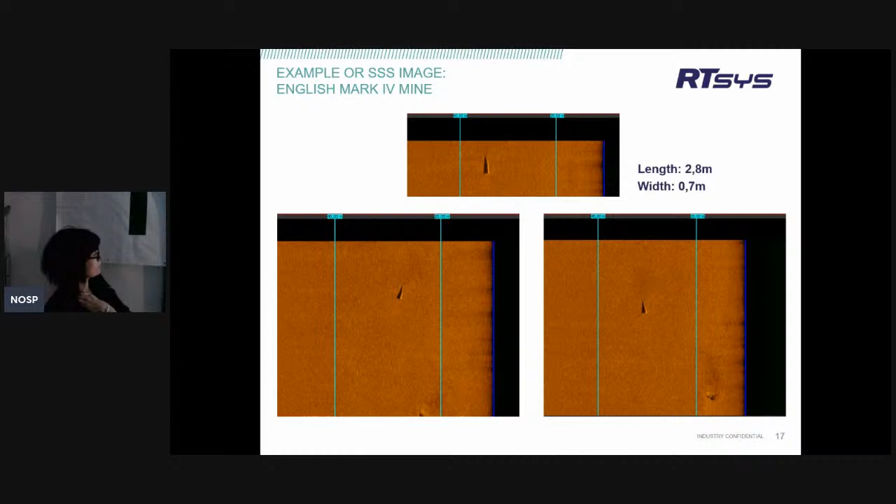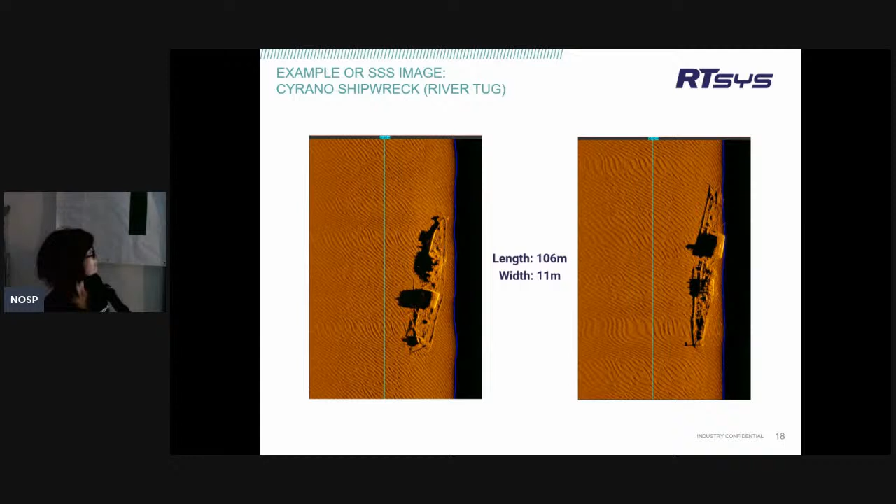Here it's also a small video showing the side scan sonar.

So applications on this as well: you can see seabed mapping in very quick time and on the right area, but you should also get 3D images. So it can be useful in network inspection with surveys and also pipeline surveys, and also to inspect some cables or impacts.

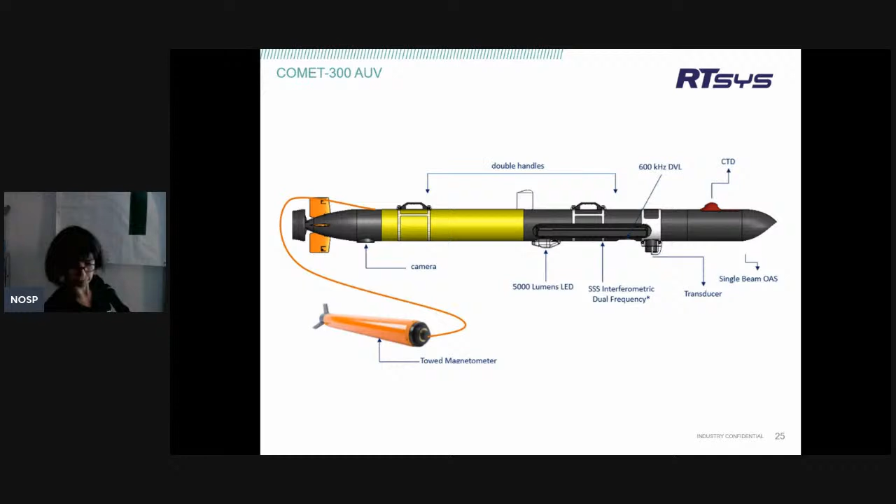So that was the first part with the side scan sonar, on which we could identify 2 cables. The first one has a diameter of 10 centimeters, and the second one 8.6 centimeters. You can see also the junction works.

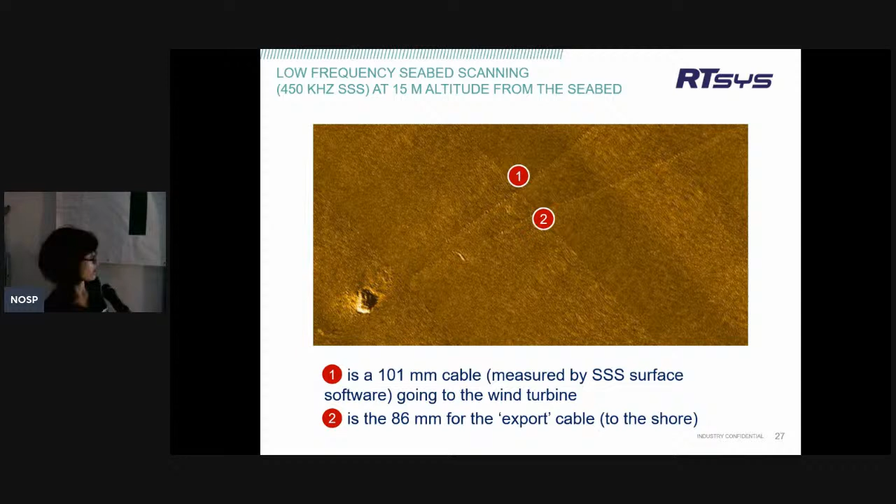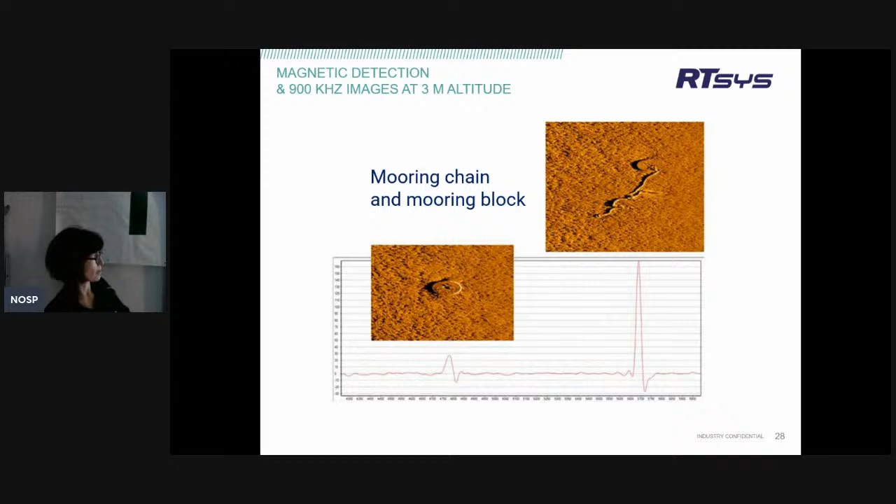Also, we can see on the curve that once it detects some ferrous objects, there is a deviation, what we call the magnetic anomaly, and the importance of the deviation is also dependent on the importance of the ferrous signature of the products.

So let's show, for example, when doing data processing, how it works for the magnetic anomaly.

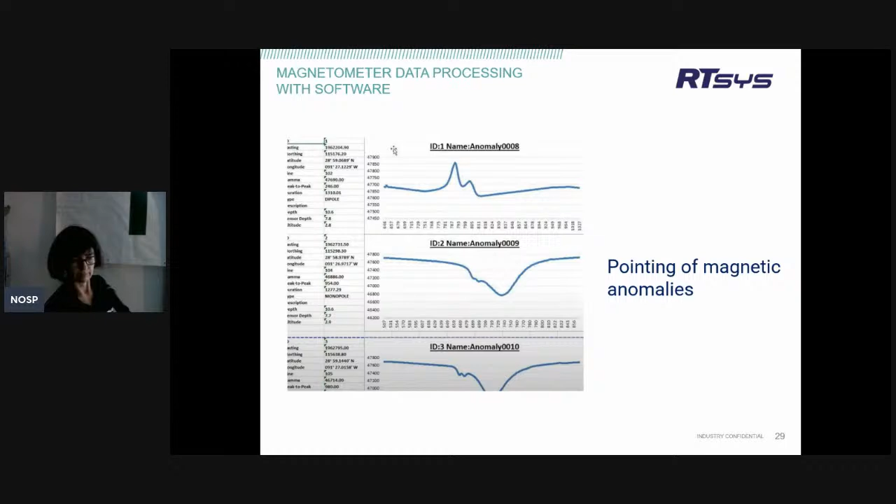I received on Tuesday an image from a survey that was done last Monday in western Italy as well, on a floating wind farm, and they could identify this chain that is about 20 to 30 centimeters in diameter and 20 meters long.

So the combination of both side scan sonar and magnetometer is very interesting. It also shows anomalies on the different survey lines, and we correlate it with the information from the magnetometer and the side scan sonar, and then we can estimate parameters, shapes, and also geolocalize all the different points of interest.

Yeah, actually that's a very good question. Well, I would actually have to come back to you about this one. It's something new that they put on our catalog, and I will try to get information from something that I saw as well. I cannot give you right now the information, sorry.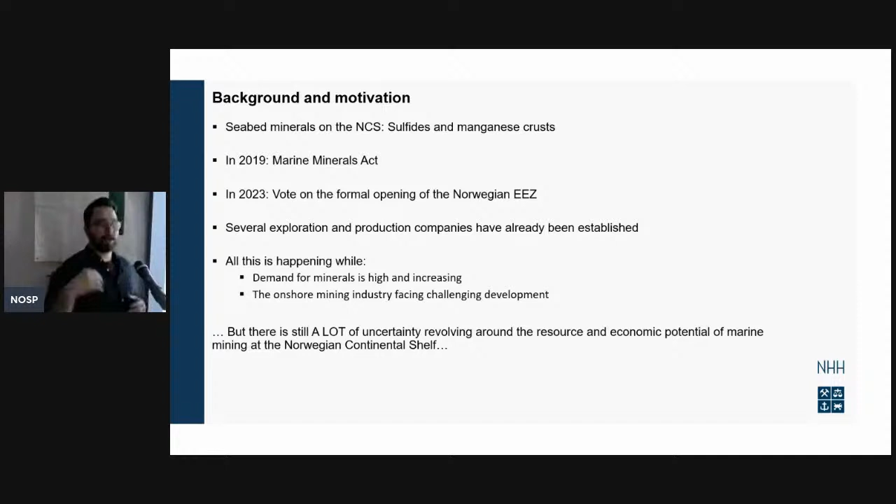On the next slide, I'm going to present a high-level overview of the model. I'm a bit worried you won't see everything, but that's not the main point. I just want to give you an idea of what the model contains. It's very simple compared to the one we've actually made, so I've done my best to make it as small as possible.

Okay, so the main idea is that we have five sectors. We have one sector describing the exploration process, one sector describing the exploration technology, one describing the mining process, the mining technology, and then a sector that takes care of the financial accounting.

The exploration process is first in line, so I'm going to talk a little bit about how we define that in the model. We start out with this big area where we think there could be minerals somewhere.

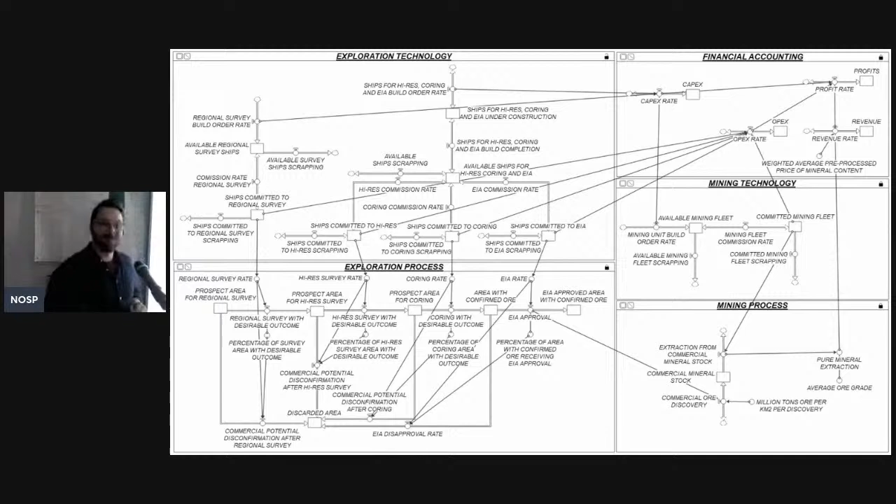Then we conduct regional surveys with surface vessels. After evaluating that data, we conduct a high-resolution survey, for example with AUVs. After evaluating that data, there is coring - taking coring samples to figure out the mineral concentration in the area, and whether it would be worth trying to extract those resources. That's the main thing to take away from here.

I'll move on straight to the results. What we investigate are three scenarios. We have one scenario where we consider an average ore grade of 3%, a mix of copper, zinc and cobalt in the ore. Then we have one where we consider 4%, and one where we consider 5%.

What's interesting about these scenarios is that when we talk to industry players working with this, they say 5% - that's what they expect in terms of ore grade. Of course no one knows for sure; there's been a few samples taken and there's still a lot to explore, but industry generally expects 5% concentration. But when we talk to academics working with the geology of this, they say that's a bit too ambitious considering the other assumptions made in the model - they say 3%. So we take the academic perspective, the industry perspective, and the middle in between them.

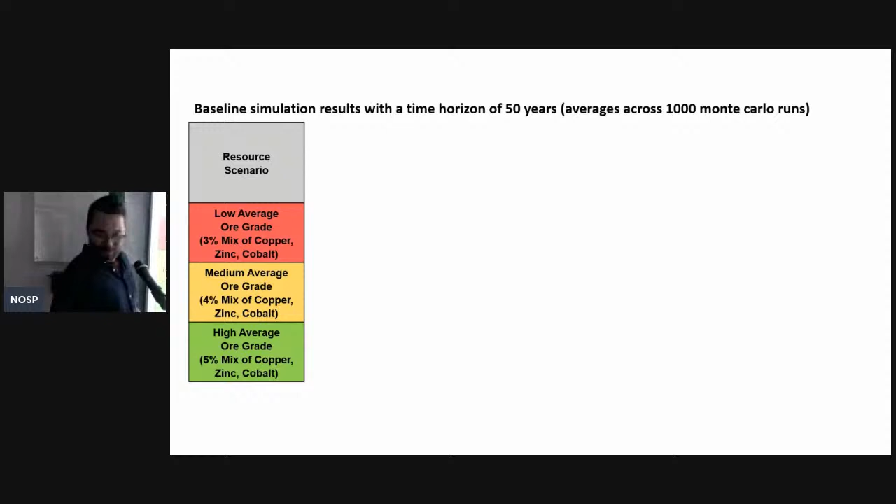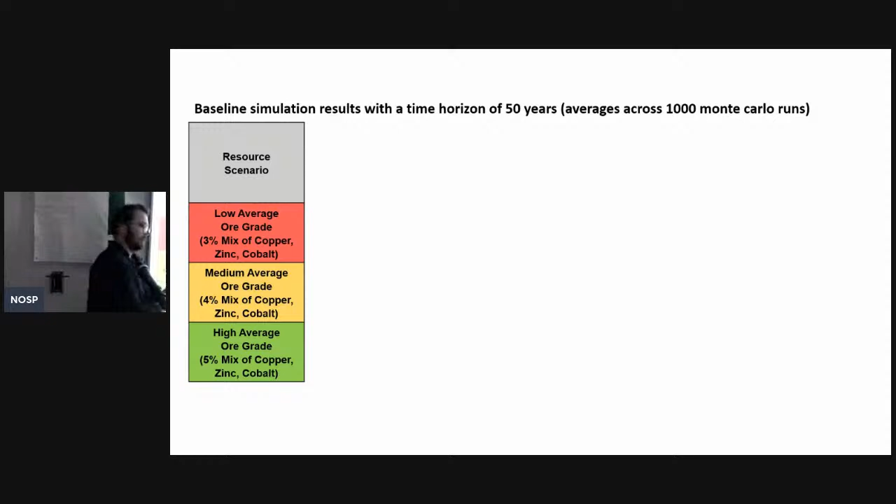Then we simulate the model over 50 years, using Monte Carlo simulations - basically running the same simulation over and over again with different paths of uncertainty, so there's randomness built into this model as well.

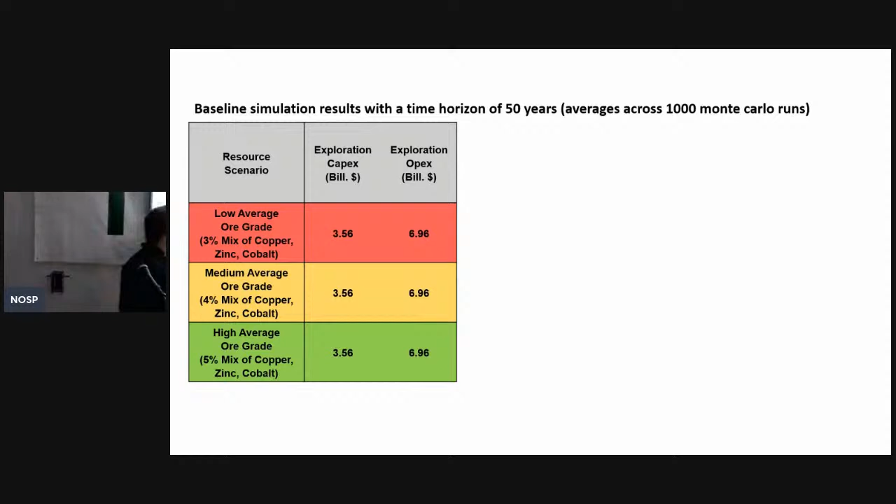First, the costs associated with exploration - these are the costs we go through with everything as we explore the entire area, take the resources we find, and extract them. We're talking about quite a bit of money here: the expected costs are a capital expenditure of $3.5 billion, and approximately $7 billion in operational expenditure. So it's going to be costly.

Then we look at the mining capex and opex, and as you can see those are also significant. What we get in terms of resource estimates is between 1.8 and 3 million tons of copper, zinc and cobalt, with copper making up the most significant part - and that's quite a bit.

As you can see, that generates quite a bit of revenue. The net value - revenue minus cost without discounting anything - ends up as quite a huge surplus. But when you look at the net present value, the discounted net present value, you see that's negative for the 3% case.

That's the academic expectation, as we call it. And then it's positive, you see, for the high-grade scenario. The reason for this is that we have all these costs at the beginning, long before you're generating any revenue. So your costs are high while your revenue is discounted quite hard because it occurs far into the future.

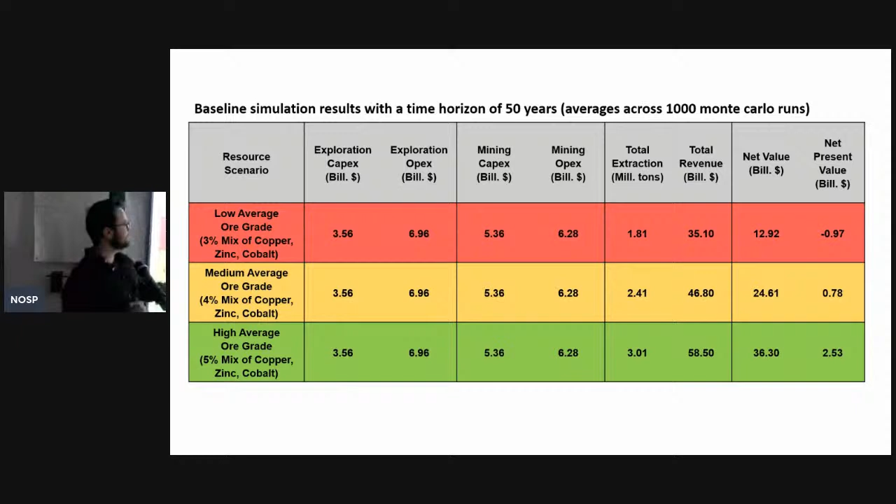But if you guys can help them reduce these costs by inventing some magic AUV sensors or something, and reduce the amount of coring without reducing the quality of the exploration process, then maybe that could be a cool thing. But just a disclaimer as well, that we're basing this on the available literature, which is scarce.

So we also rely a lot upon information from stakeholders in the industry, academia, and the public policy sector. A lot of these things that go into the models, we don't have data for, so they are guesstimates. This study as a whole is kind of speculative in nature, and that's important to keep in mind. So yeah, just want to say that as well.

Do you have any locations or classifications on what areas have already been identified? There is something going on regarding deep sea mining, yes. It's deep water, we're talking 2,000 to 3,000 meters. There is a huge discussion revolving around it.

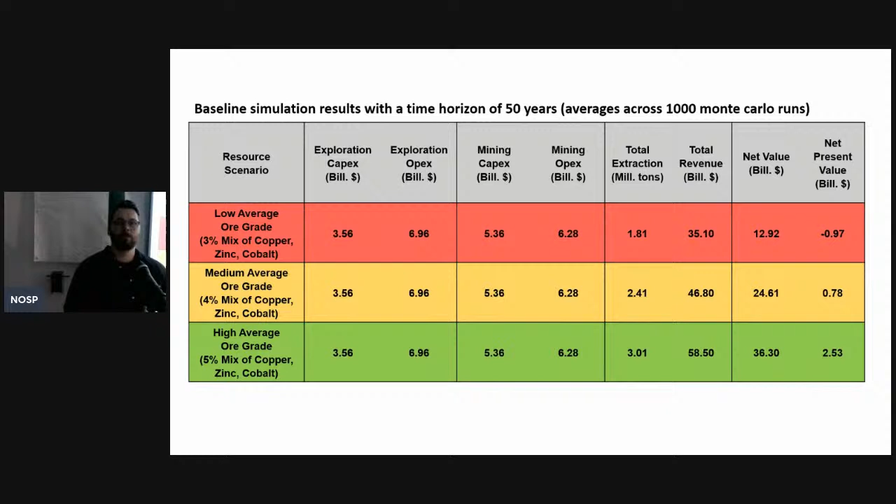So this is based on the Norwegian continental shelf. I presume you could look for other regions and extrapolate this out if you wanted to. Yeah, then you would initialize this model with different values. For example, we initialized the model with 80,000 square kilometers of area that we want to cover, and all these percentages and different things that enter the model are based on knowledge of the Norwegian continental shelf. So that would obviously change, but the structure could be largely the same.

I'm very curious how you fit different things into a model. Okay, is there any other questions before we wind up the presentations from today?